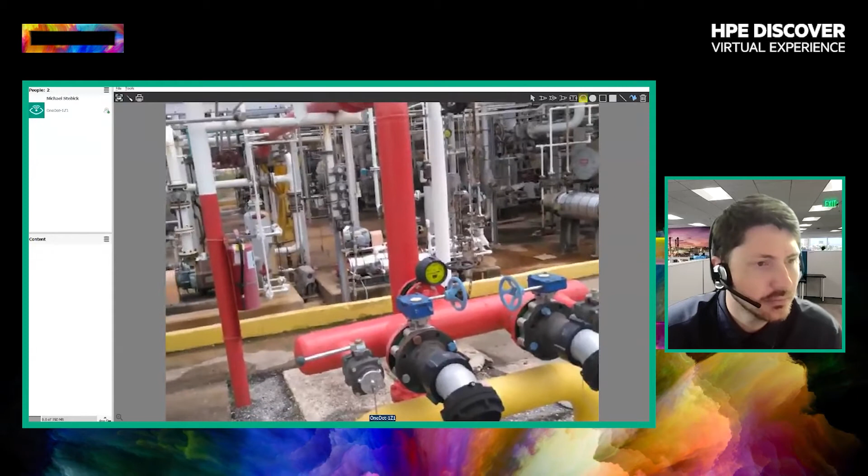So without any further ado, we're going to go to Mike Kiram, who's live in the plant. Mike, are you there? Yes, I'm here. So we have a live audience that we wanted to demonstrate the remote worker solution, how we're able to communicate and collaborate remotely without having to physically be there or travel.

So can you maybe go up to the vacuum pump, which is one of the most critical pumps, and show a couple of the wired sensors and the QR code that we'll be touching on in our second demonstration, please?

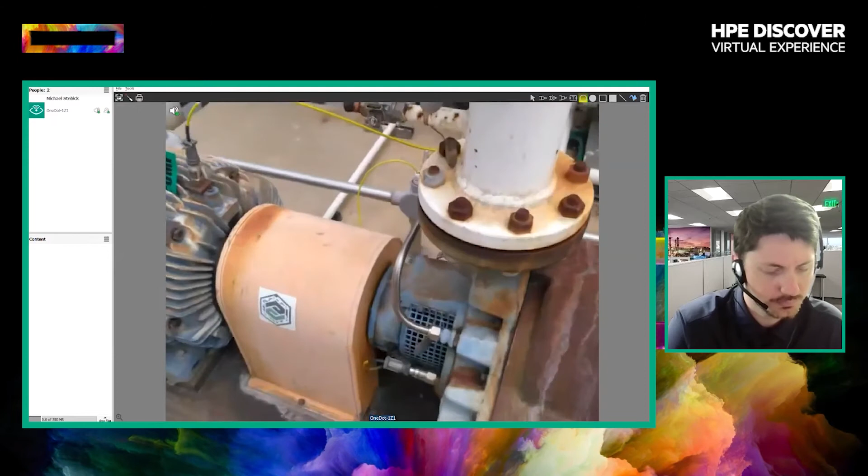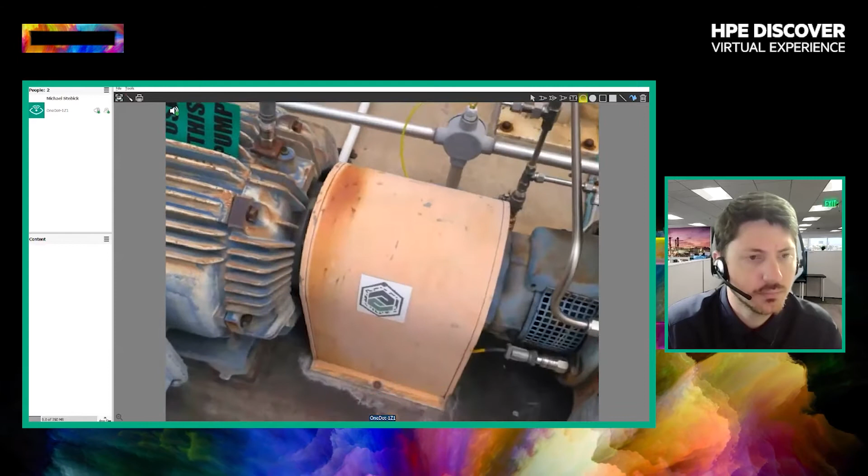Sure. Okay, this is the vacuum pump, and it is a mixed phase vapor and liquid vacuum pump. The pump is on the right, the motor is on the left. We have a temperature and vibration sensor on the pump suction bearing right here. We have a temperature and vibration sensor on the pump discharge bearings. And we have a temperature and vibration sensor on the motor bearings. On the coupling housing here, we have a thing mark that provides the augmented reality reference point and identifies the pump.

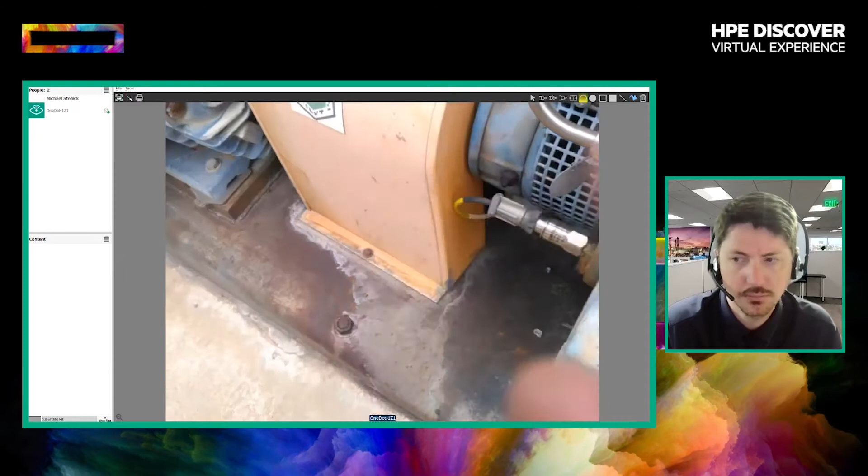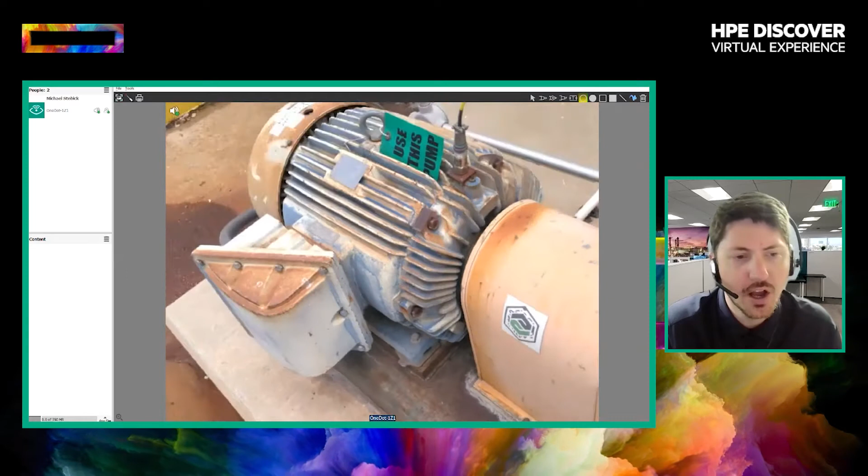Oh, here, look, let me let you hear the pump. Okay, I'm on the discharge bearing area. I'm not touching it. So just for the audience, I want to demonstrate that was to demonstrate the noise cancellation. Notice we don't hear it because it's got great noise cancellation, so we can have crystal clear communication. However, sometimes when we're doing repairs and troubleshooting, you might want to hear some background noise, so you can toggle that off as needed.

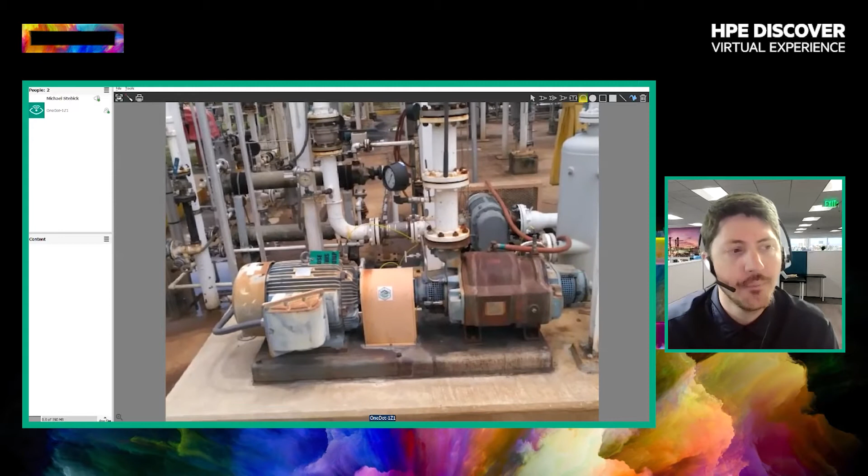Mike, I'd love to show that we can document stuff in the field. So can you maybe take a snapshot of the pump to show that we can record anything you're seeing in a live session and have a picture documented for later purposes? Sure, take snapshot. So for the audience, if you see over here, I have a content window. That picture just showed up.

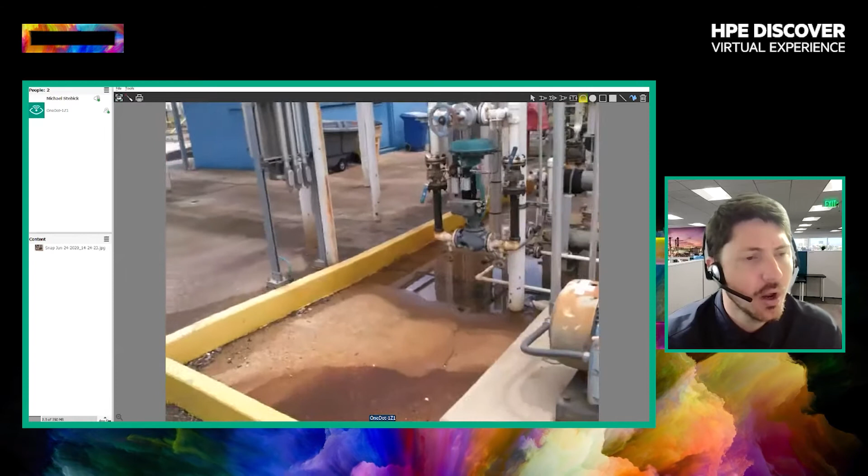So Mike, if you could head over to the panel, I'd love to demonstrate a couple other things for the audience real quick.

Sure. So as you see here, he's looking at one of the panels. He might not be sure what to look at or what to pull or anything like that as far as a lever or button. So I can actually do live annotations on my computer that he's actually seeing on the HMT-1 headset. So Mike, can you say to the audience to demonstrate that, what shape and what color it is I'm annotating on and maybe what I'm hovering over? It's a yellow oval. It's around the LED vacuum indicator in the upper left-hand part of the panel. Okay, great.

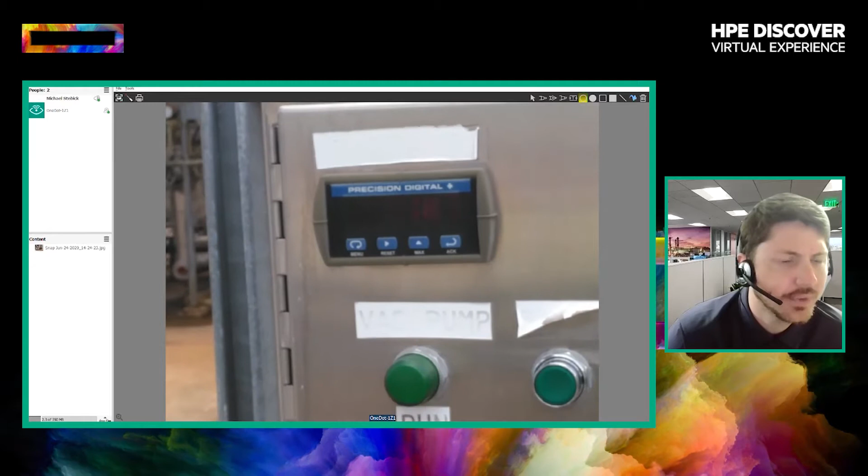And can you zoom in just to show we can get really up close and personal on the equipment or asset to see through your eyes? Yeah, I'm standing 3 feet away from the panel right now. Zoom level 5, it looks like that's about 78.8. Is that correct? 78.9? Yeah, I just switched to 78.9. And also, I can come in closer. It has an autofocus. Oh, that's fantastic. So you can definitely read that, yeah. So no issues there. But 78.8 and 78.9 are normal for that, so no concerns there, right?

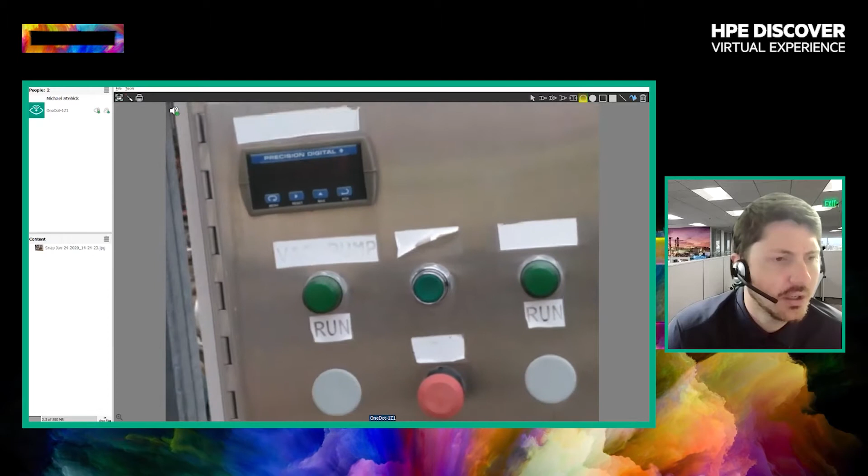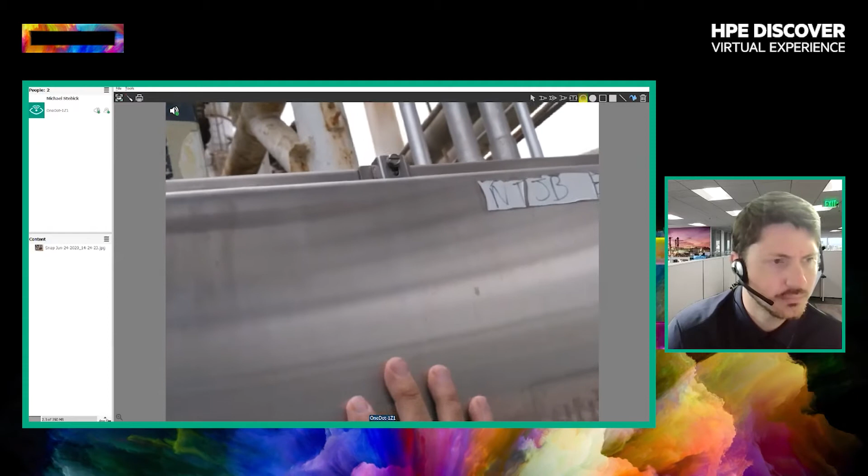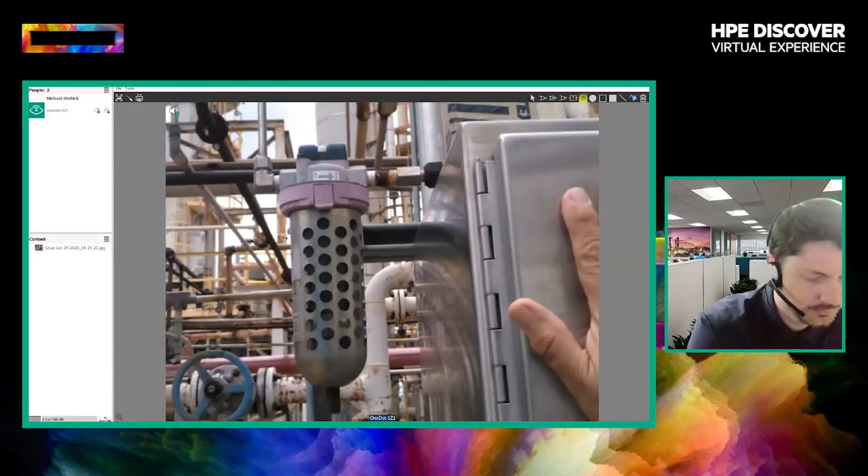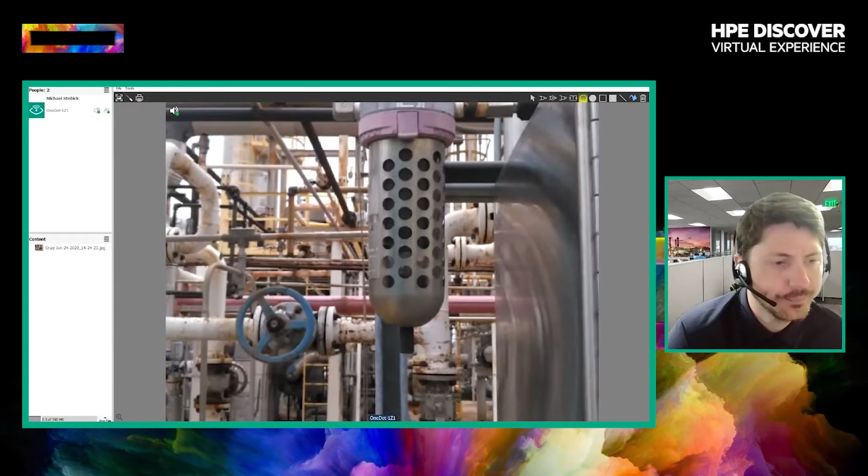Exactly. Can you maybe show what you uncovered in our last demonstration too about the cooling? Sure. This panel right over here has the electronics associated with the vibration sensors we showed you. And while I was out here, I noticed something. The panel is cooled using plant air with a vortex cooler, which takes the compressed air and generates cooling that goes into the panel. When I was over here, I realized that there is no airflow, and someone has isolated the air supply, and I don't know why. So while the panel's okay right now, when the temperatures get up there, we really need the cooling. I could contact the control room right now and find out who turned it off and why, before I just turn it back on not knowing why it's turned off. So it's an example of being able to collaborate while I'm here or when I discover it.

And that's great. Well, really appreciate you doing the live look-in, Mike. That was fantastic. I think it really shows the audience how we don't have to get on a plane or do a truck roll to get on site, that we could see through your eyes and collaborate remotely from anywhere around the world. So a ton of benefits there.

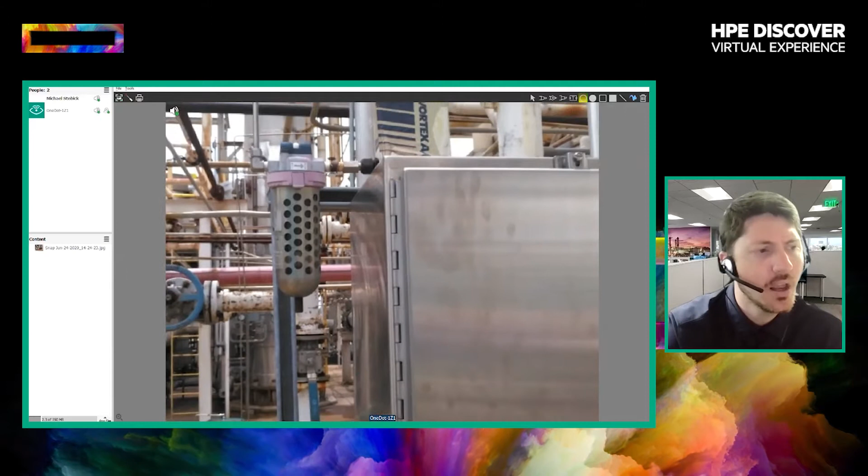I do want to show the audience that we can pull up that snapshot he took standing in front of the pump just to show what that looks like. Notice high quality, high resolution photo of the pump. This is timed and date stamped over here. And then we can have it saved in the room until we upload it to the cloud or to the on-prem storage. Since this is HPE Discover, we do use Nimble storage for our on-prem storage at the plant. So with that said, I'm going to roll back into my next demonstration. So thanks, Mike.

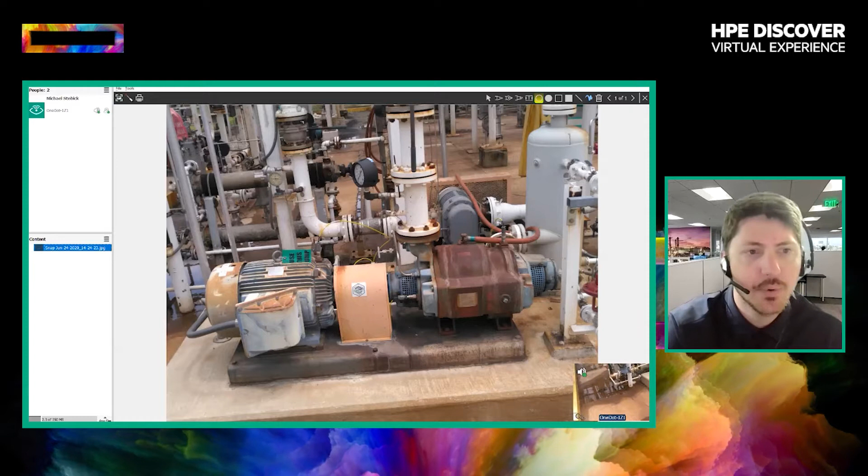So for my second demonstration, as you saw on the pump, we have a QR code that was on the middle of the pump right here that I'm circling just in case you need a quick refresher. That QR code is a scannable image that triggers the display of an augmented reality experience. The augmented reality experience that I'm going to show you was completely customized for Texmark, the Refinery of the Future. At CBT, we're able to build customized dashboards and user interfaces depending on the customer and the challenges that the operators and management want us to solve. So I'm going to play a quick video to show how that looks.

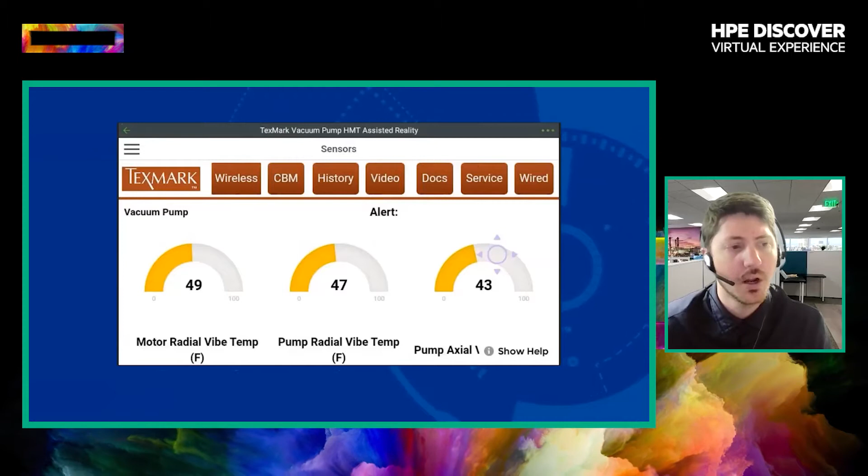So once we scan that QR code, it brings up the dashboard. Again, that was completely customized for the Refinery of the Future, and we can do different ones for every customer based off their vertical. The first tab shows the vibration and temperature, which are critical for the pump. The second is condition-based maintenance, which shows the scheduled repairs for the upcoming pump. History shows historical values over a date and time to detect any anomalies while we're doing our inspections and rounds.

By saying video, it takes us to the video tab that has local videos such as training videos uploaded, as you can see that playing. The Docs tab shows any kind of technical specs and user manuals that we have for the equipment, and it could be a 5,000-page PDF. The Service tab has kind of a video holder to show any kind of videos on how to do the maintenance, and the Wired tab shows the reading from those 3 yellow wired sensors you saw attached to the pump.

So again, this was a completely customized dashboard for Texmark, but we can do anything, and we can have all these on different assets, different assets and equipment all throughout the plant, showing different experiences and all the real-time data. That pump is 50 years old, so when you walk up to it, it's very critical to know exactly what is going on with it as you're doing your inspections and maintenance on it.

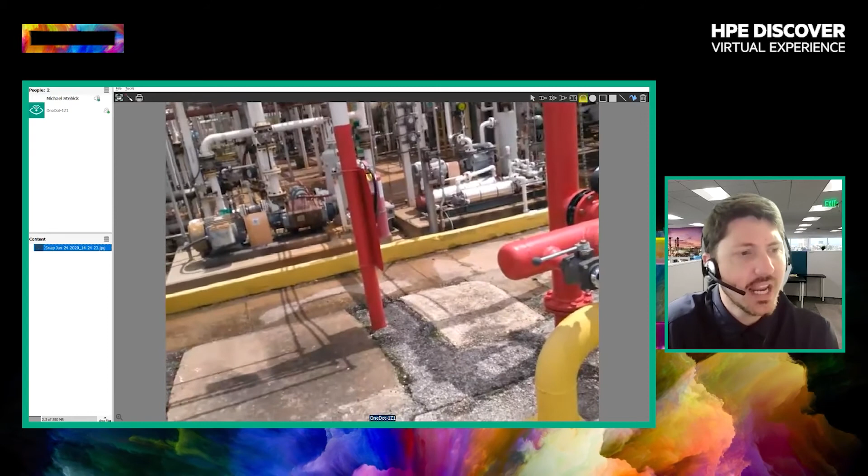So with that said, I'm going to go to Mike. Mike, are you there? Looks like he just joined the room. Notice he just toggled on his camera. Mike, we can't hear you. If you could toggle on your microphone, please.

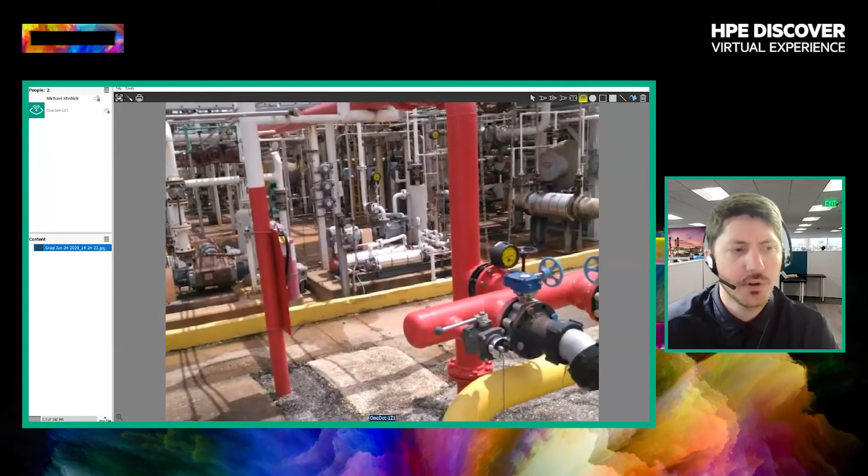So Mike is at the chemical plant, the Refinery of the Future in Houston. Again, we're able to see through his eyes and communicate with him and collaborate to do any kind of repairs, troubleshooting, or coach him as a new operator at the plant. So Mike, can you walk up to the vacuum pump, one of the most critical pumps, and show the wired sensors from demo 2 and point out the QR code for the audience?

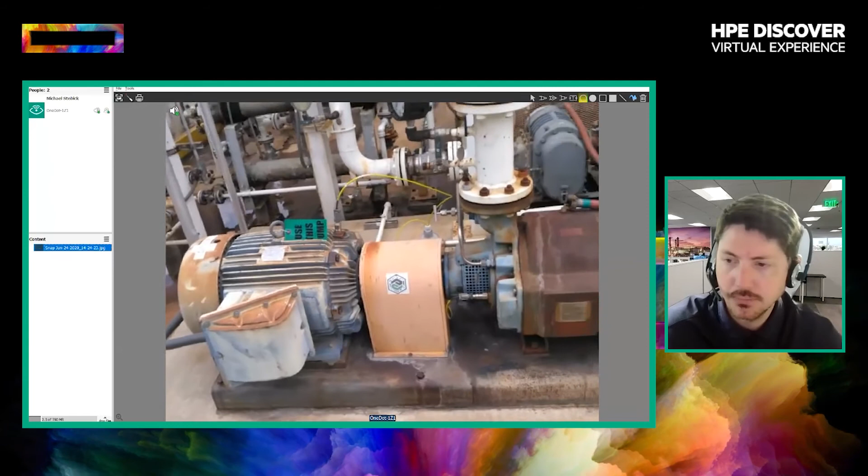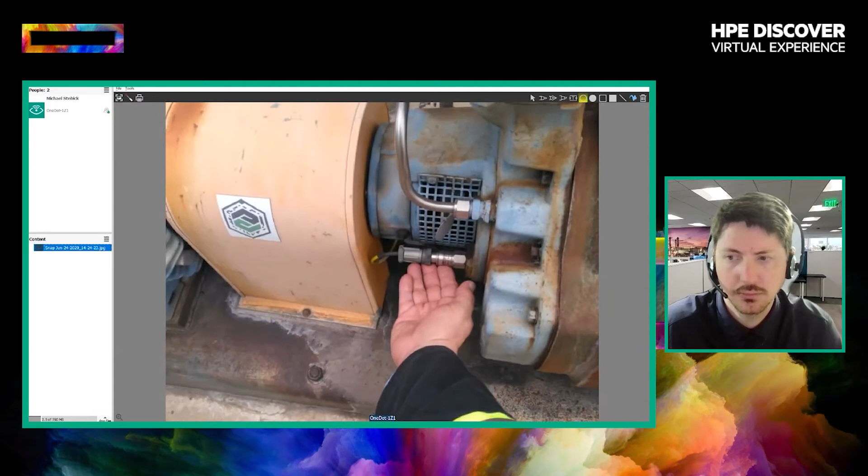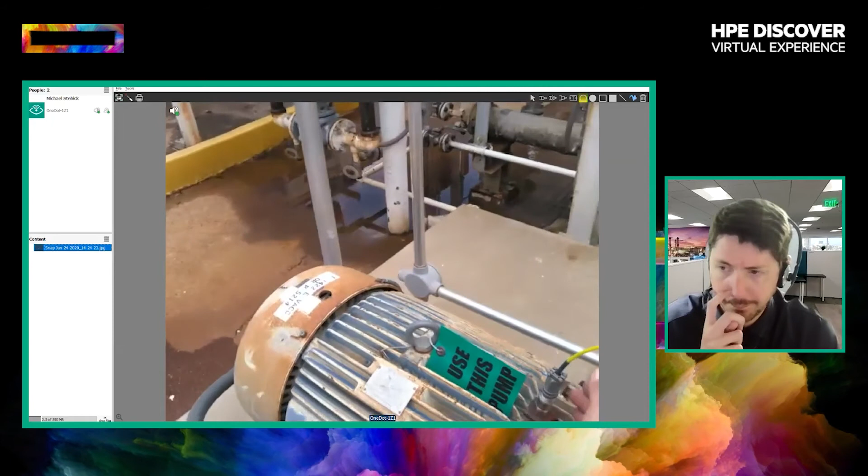Sure. Okay, so this is the vacuum pump. It's a mixed phase vacuum pump with liquid and vapor. Pump's on the right, motor on the left. On the pump suction bearing, we have a temperature and vibration sensor, and on the pump discharge, we have a temperature and vibration sensor. On the coupling housing, we have a fiducial mark, which provides the reference point for augmented reality and identifies the pump. And we have a temperature and vibration sensor on the pump motor bearing.

Okay, great. Oh yeah, do you want to hear the bearing noise? It's normal for the pump because of the mixed phases.

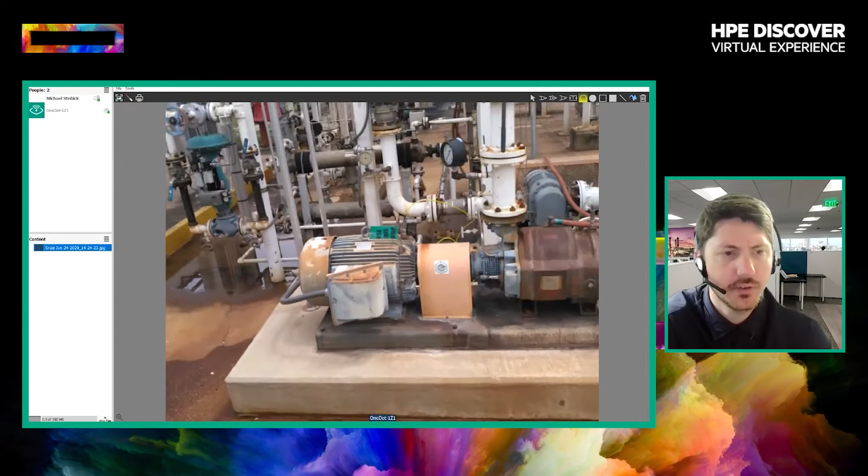Okay great, and then can you stand back and take another snapshot, just so we can show how that looks, how we can document anything in the field real time? Sure. Take snapshot. So for the audience, we just did a first round during the session here, but the second image will pop up in the content window here shortly.

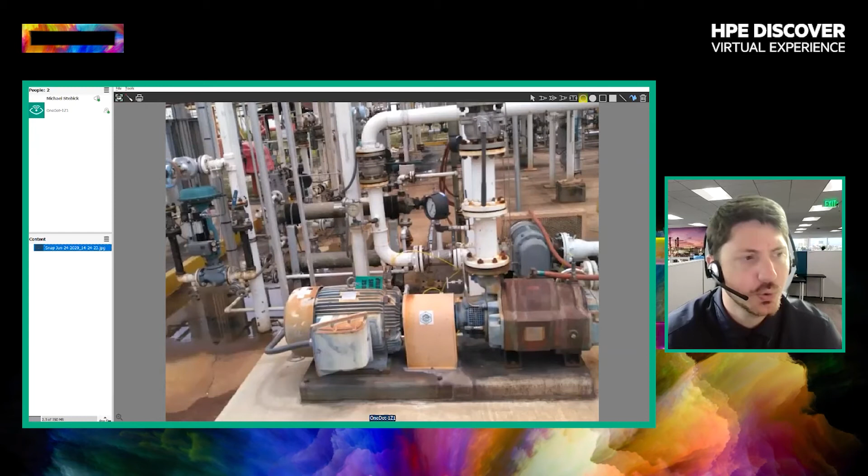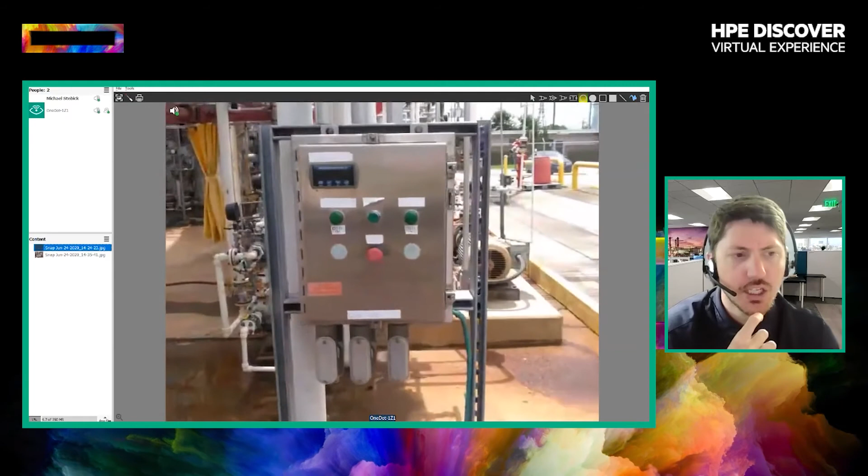Mike, can you go over to the panel real quick, just so we could show that? Looks like we just had another attendee join. I just wanted to show that we're doing a live look-in at Houston, Texas at a chemical plant. We have one of our engineers, Mike Kiram, who's in the plant.

So with our solution, we're able to connect and see through his eyes and communicate bidirectionally, so we can help him do specific jobs and tasks as the subject matter experts. So again, without needing to get on a plane or do a truck roll or travel, we're able to help him get that job done correctly the first time to get the equipment up and rolling.

So I also want to demonstrate live annotations. Anything I annotate on my screen, he's actually able to see on the heads-up display of his head-mounted tablet. So to demonstrate that, Mike, can you say what color and what shape of what I just annotated?

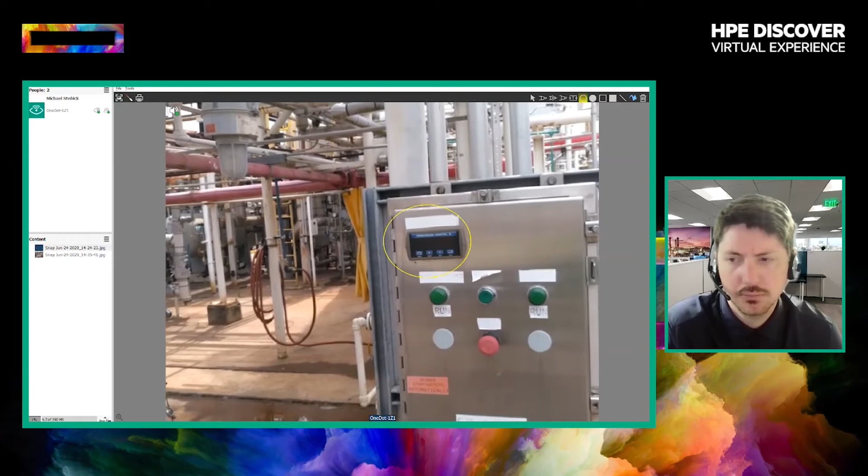Yeah, it's a yellow oval around the pump vacuum indicator, upper left-hand part of the panel. Okay, great. And then can you also zoom in to show that we can see the readings pretty close, without even having to physically be there?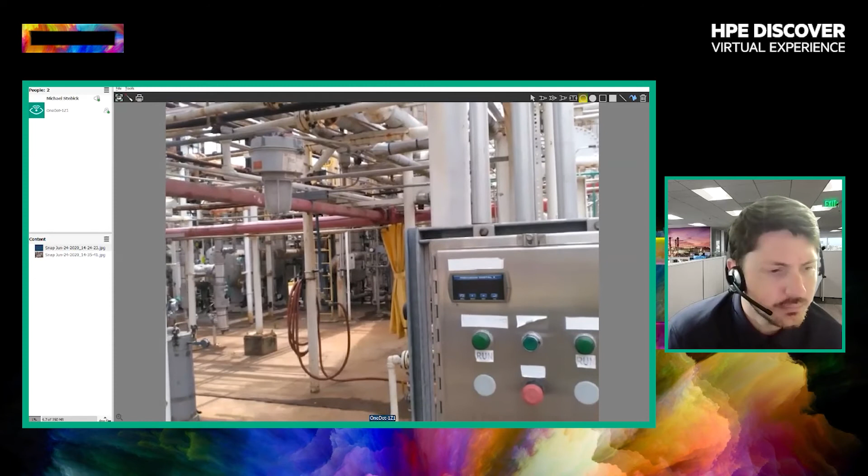Okay, and I'm about 3 feet away from the panel right now. Zoom level 5. I'll also move in where you can see it closer. It is autofocus. Oh, that's nice. So it looks like it's 73 or 79.2 or 79.3, but that's normal for that pump, right?

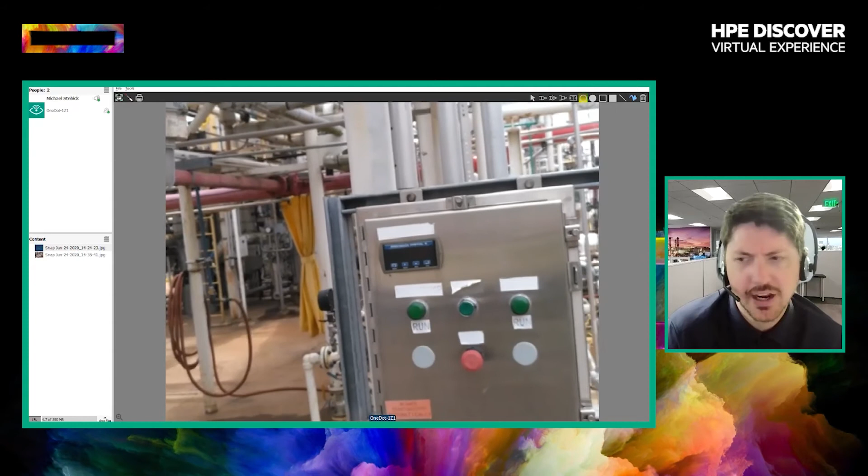That it's normal for this pump, and that's the correct number. Okay, great. And then if you could zoom level 1, maybe show what you were showing me about the cooling, I think that's really cool that we just uncovered in this last demo. Well, it's not cool enough, you'll realize. So this is the panel that houses the electronics associated with the vibration sensors and the edge gateway.

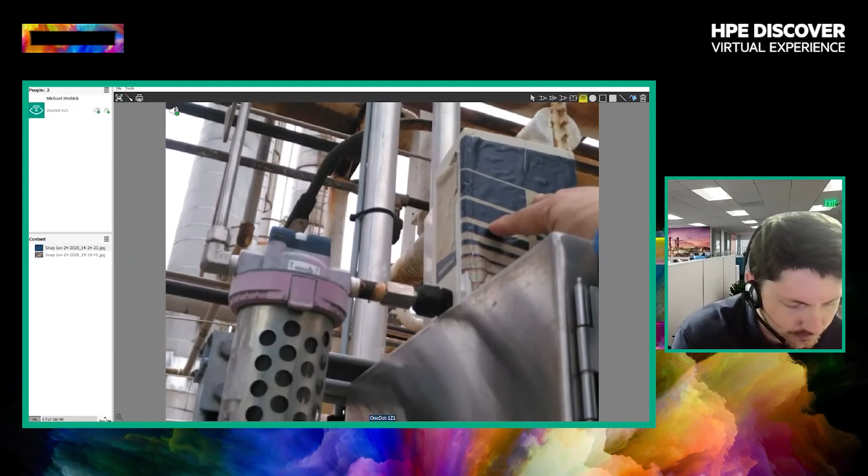This is a vortex cooler that uses plant air, compressed air, in order to generate cooling that's injected into the cabinet, and it's a filter. And when I was over here inspecting things, I realized someone has turned off the plant air associated with the cooler. While current temperatures here, it's not a dire emergency, but as temperatures continue to go up in the summer, we don't want to be surprised by failing equipment.

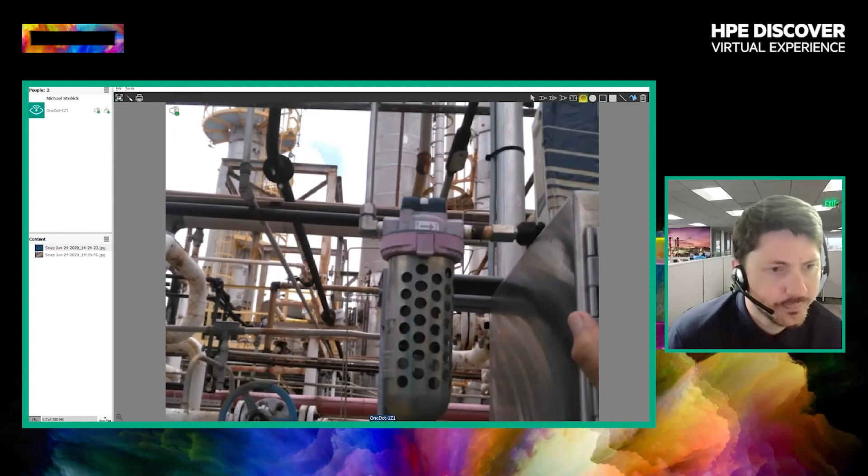So this is an example where I can reach out to someone, and while I'm here, show them what I found and collaborate with them to find out why it's turned off. I just can't turn it back on without knowing why, so we can get this resolved. And the nice thing is, we would normally have to be in full PPE standing next to you, but we can see everything you're seeing from the comfort of our own home office or actual office.

So very cool stuff. And just to show the audience, when you took that last snapshot in front of the pump, I can pull it up in front of the content window right here just to show it. So notice the high quality, high resolution photo of the pump. We can use this for documentation to show work was completed, detect any kind of anomalies, show if something was smoking on that pump, for instance.

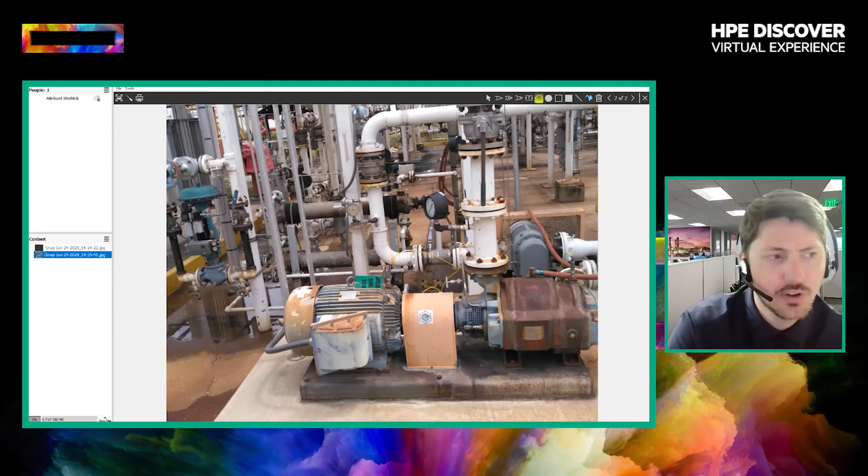So this is actually saved in the room until we move it to our on-prem storage. We're using Nimble storage such as HPE Discover, or to the cloud. So that's our live remote worker demo. Again, no need for travel. We can have our boots on the ground, our operator, communicate with us one-to-one or one-to-many all around the world real time to help do that job or that task.

For our second demo, I just want to play it again real quick. It's an AR experience. As you see this QR code that I'm circling here, that was actually on the pump itself. That QR code can be scanned by the HMT device to trigger the display of an augmented reality experience. It's this customized user dashboard. So I'm going to play the video real quick and talk through it for the people that just joined.

Just like your cell phone, we can download tons of apps from the App Store or load any kind of Android APK or other company app.

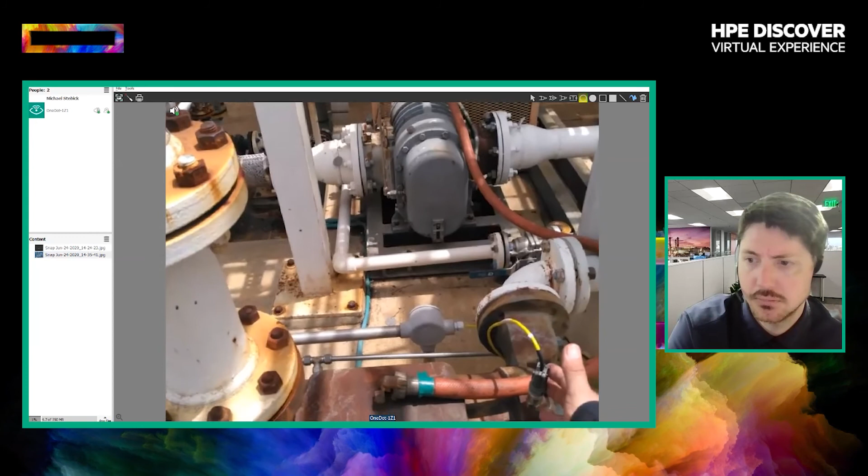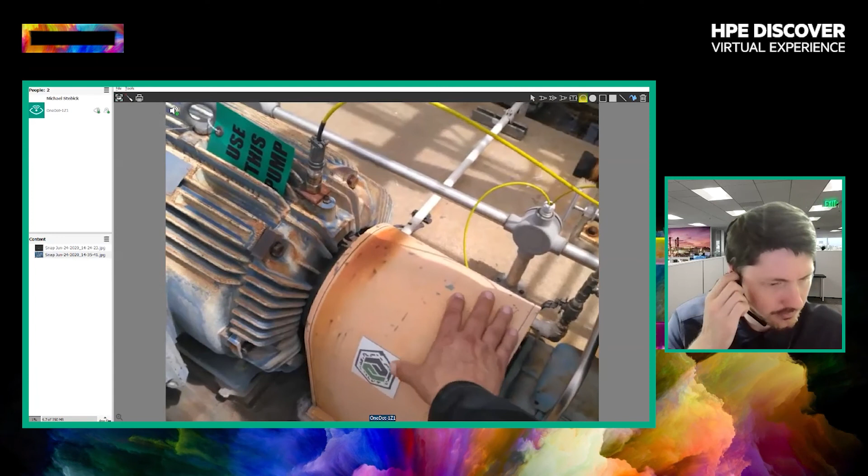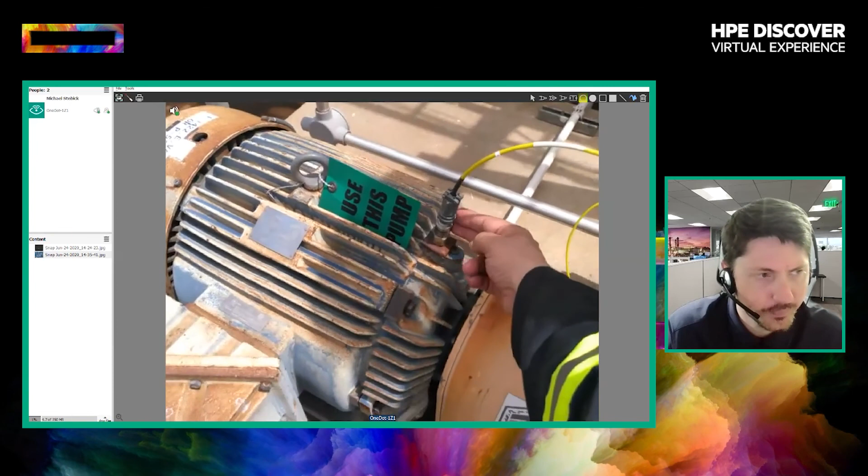Vacuum pump, there's a temperature and vibration sensor. And on the discharge of the pump, there's a temperature and vibration sensor. On the coupling housing, there is a thing that gives you your point of reference for augmented reality and identifies the pump. And then on the pump motor bearing, there's a temperature and vibration sensor.